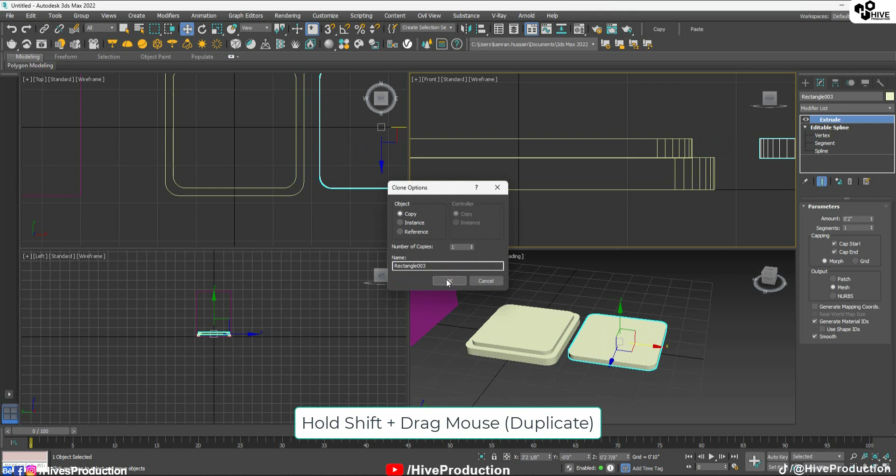Take the duplicate by holding shift key, and after that take their spline, scale down their size more, make them centered, and make them outline to create some beautiful extrusion and apply the extrude. So you can see one object is filled and the second one is filled with their amazing outline.

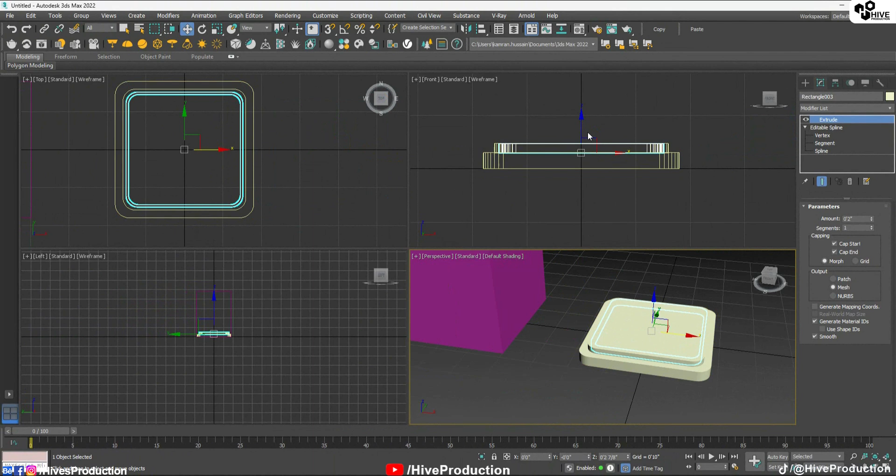I'm going to put them on the top like this. So this is my 4 feet tall box.

I'm going to give the simple box and I will draw a box approximately 10-inch or 9-inch height. 9-inch has to be 10-inch, perfect.

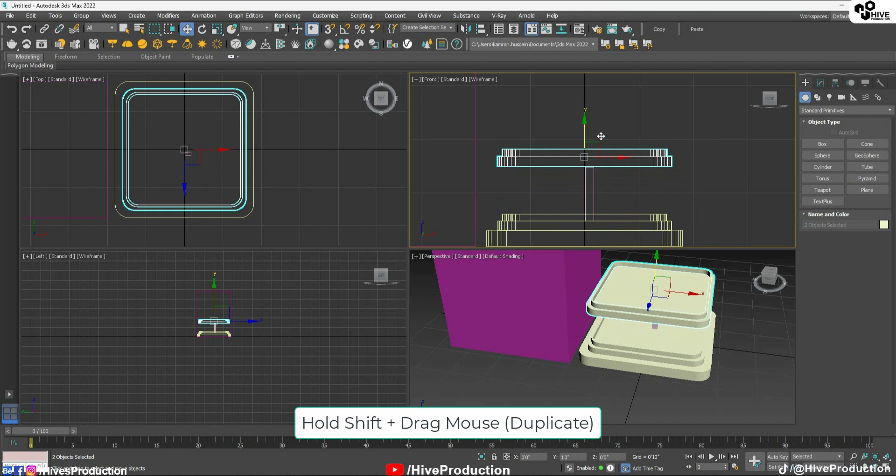So I'm going to put them here, select their shelf, and take the duplicate by holding shift key, and I'm going to take 2 more duplicates. So it's total 3 duplicates.

Now I'll go to the modify panel and I'm going to draw a rectangle by 4 feet height. I'll delete this one. I'm going to check their measurements, 3 by 3 feet, 4 by 3 feet, sorry.

I'll go to the editable spline conversion, right click on it, convert them into spline, take their segments, delete this extra one, and then select the vertices from the top and make it fillet to create some smooth edges.

After that, put them here and select the spline, go to their options and find outlines, give them outline depth something like this, select the vertices and set them on the corner like this. From both sides, select them on the corner like this.

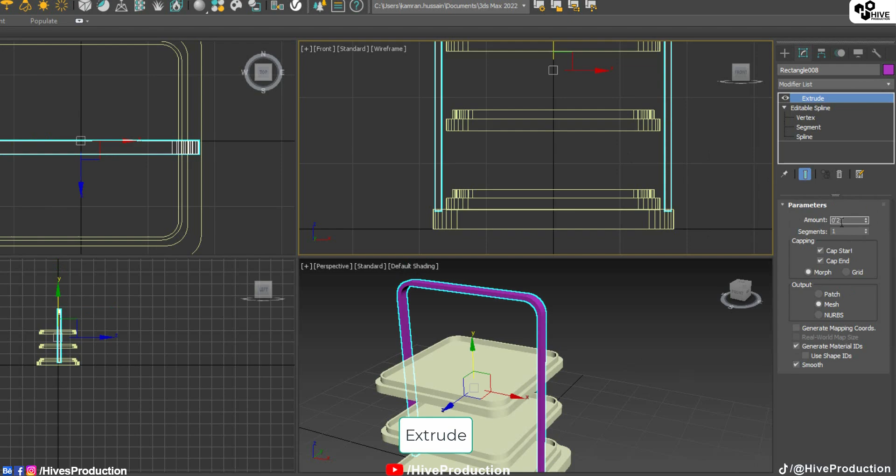Now go to the extrude modifier, give them a depth approximately 2 inch, I think that's 1.6 inch. I think that's much better, and scale down their depth as well.

So it's the basic structure as you can see on my 3ds Max software. We have to go to the editable poly, select them and convert them into poly, and after converting into poly I'm going to give them edges.

Go to the edge tool. First I'm going to give the color change, and give them a line like this. Select the line and select the vertex, make them fillet to create some smooth edges.

Just for my observation, I have to set the shape of this object. Let me show you what I'm going to do. I'm going to select this one, go to the edge, find edge connect.

And give them edges by connection like this, and I'm going to set these edges according to the direction of this. Now I'm going to delete them, delete this one, I don't want them.

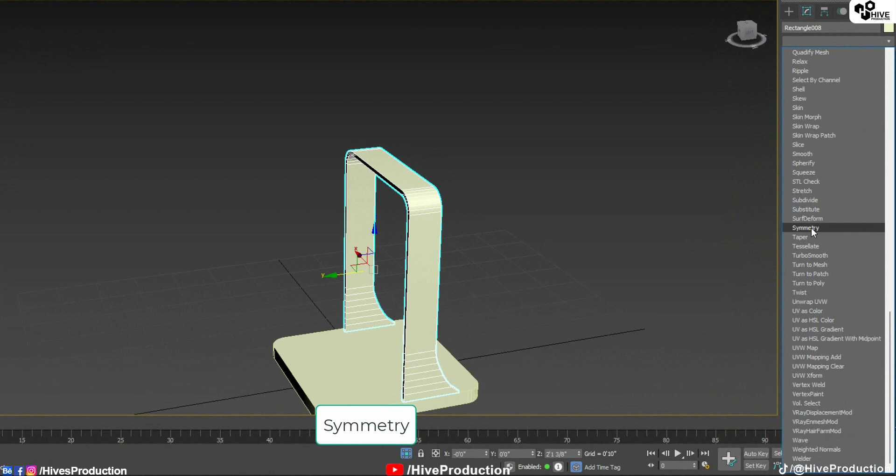So now it's filled, and I'm going to apply symmetry modifier. Symmetry will duplicate from the front and back the same positions. So this is the basic structure of my product shelf.

So what am I going to do? I think we should take another rectangle, and I'll draw the rectangle from this position here.

Convert them into editable spline. Select their vertices, put them here. Select this top vertices and make them fillet to create a smooth edge, and then put an extrude modifier to give some depth, not too much. I think this depth is okay.

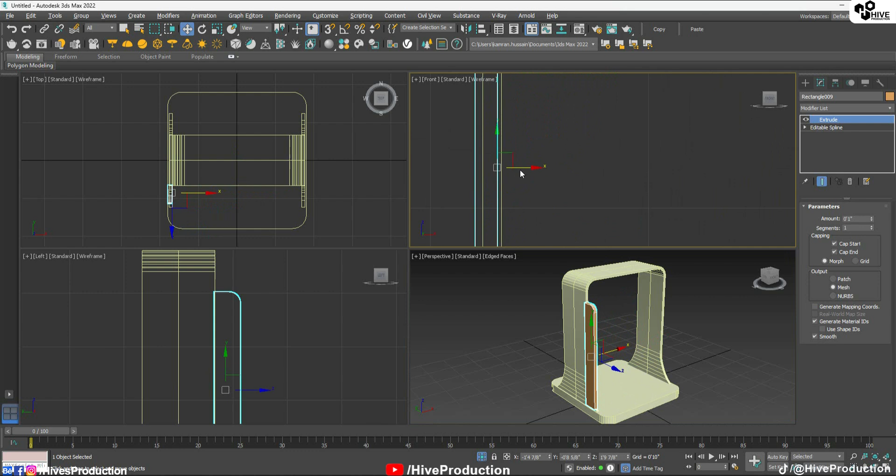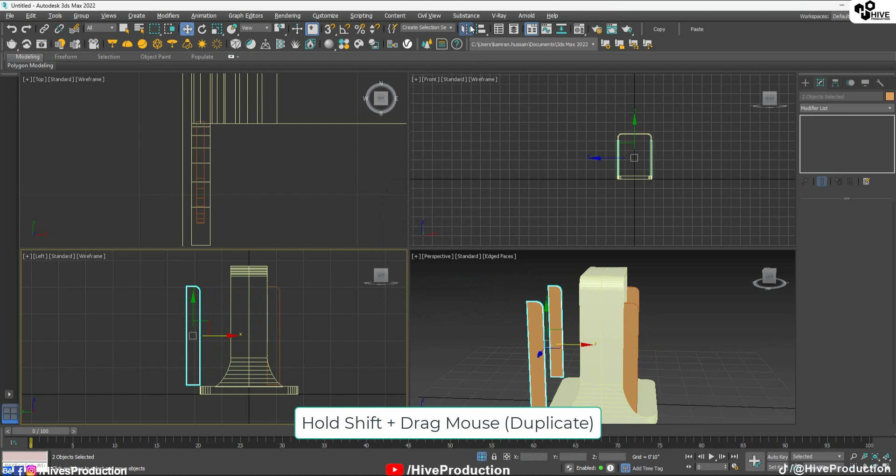So I'm gonna place it by scaling here, and then hold shift key and duplicate from the other side. Once again select both of them, hold shift key and duplicate from the back side as well, and place it here.

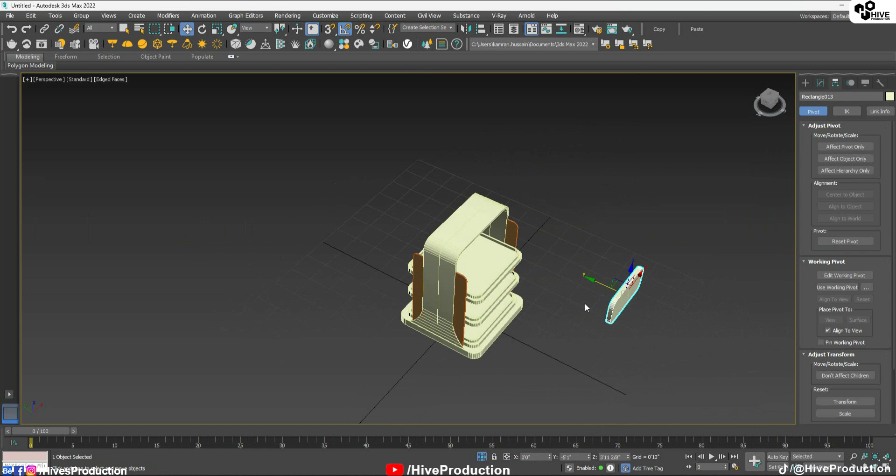After placing, we have this shape. What am I gonna do? I'm gonna take another duplicate by holding shift key, rotate them, take vertices, reduce their size, and extrude. Rotate them 90 degrees, put them on top for the header, like this. It's going to be the header, so I'm going to place it here like this.

Perfect. My next step is to convert them into editable poly. Take the polygons, go to inset, and then extrude like this. Perfect.

I'm gonna take a duplicate by holding shift key and mirror them, or maybe rotate them, and place it on the back side as well.

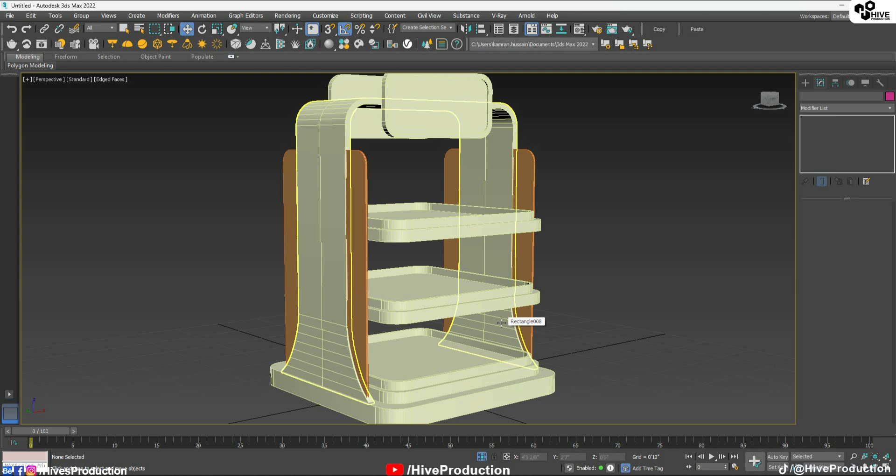So the time is to put the product in it, but here is my logo and product name. It is in Adobe Illustrator. I'm going to group them both, and this is my logo, so I'm going to save it as Irone Logos with the version 8 of Illustrator.

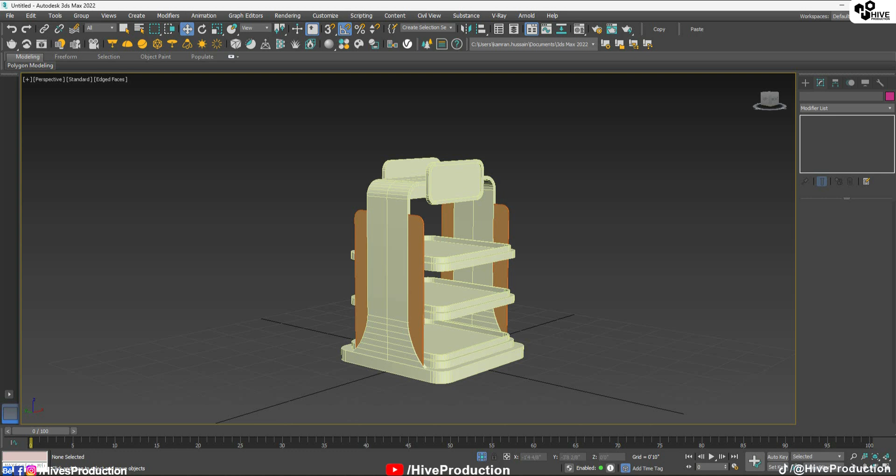So I'm going to import this one into my viewport, which is on my desktop, logos file. OK and OK, so you can find these are my illustrated logos here.

So I'm gonna increase their interpolation to create some more details, and also apply the extrude modifier to create some 3D depth in it. Here it is. So convert them into editable poly.

Go to the polygon, select one of them and detach it. I'm going to separate both logos because one is the product logo and the other is the brand logo, so I'm gonna separate them. Irone is my brand name, Roir is my product name.

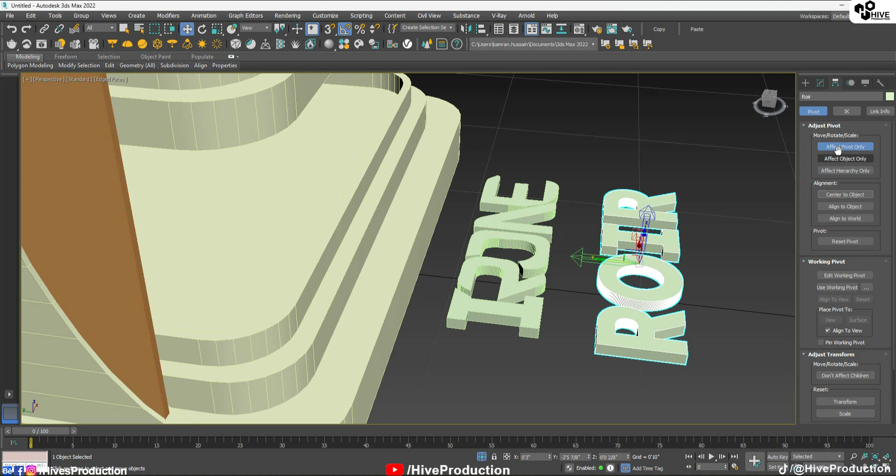So I'm gonna put the Irone name on the top, rotate it and place it not here, but on the top like this.

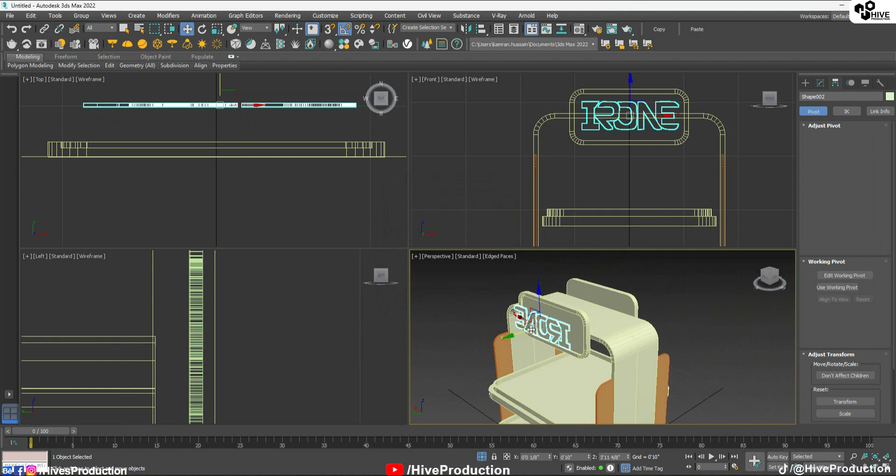And I'm going to duplicate by holding shift key and put them here. Hold shift key and make a duplicate once again, and place it on this shelf talker in the center, like this, here in the center.

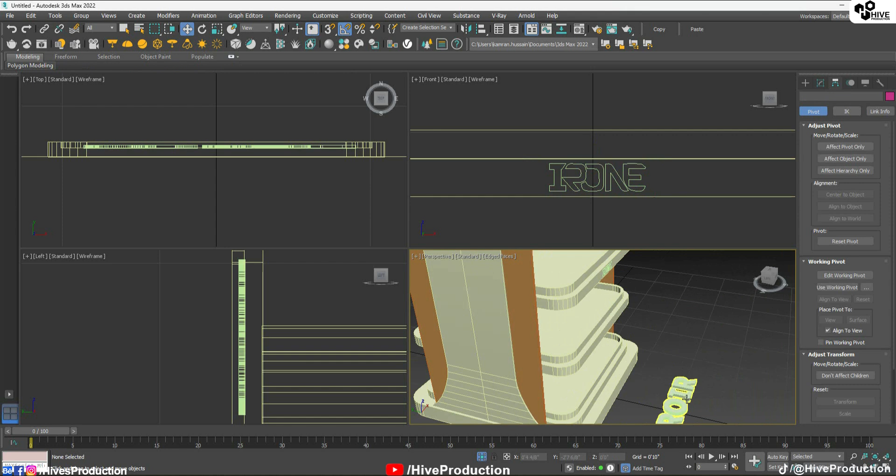So I'm going to take the Roir, rotate it and scale down its size, put it here on the right side. Hold shift key and take a duplicate on the left side as well. Select both of them and place them on the shelf talker like this.

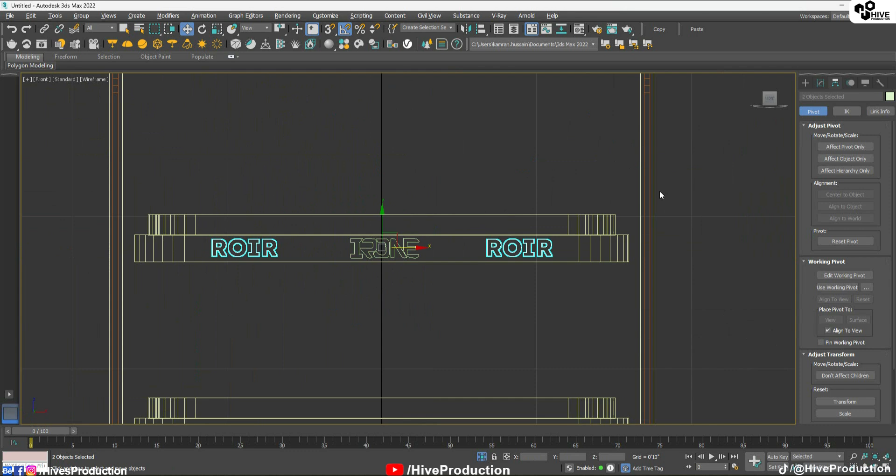So I'm going to select these three or four of them, hold shift key and duplicate here, another duplicate here. So we have the names, we have the Irone, duplicate once again, rotate them and place on the right and left side of your product shelf like this.

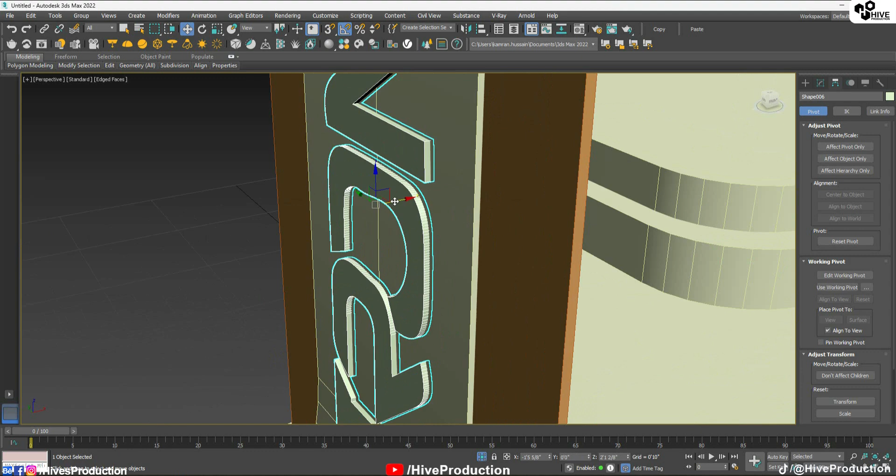So I'm going to place it here. Hold shift key and duplicate them, and rotate them. Now place it here.

Okay, so we just need the products. These are my products which I've already modeled before, and you guys can get the link in the description of this product modeling tutorial on my YouTube channel, this one, product rendering in 3D Studio Max.

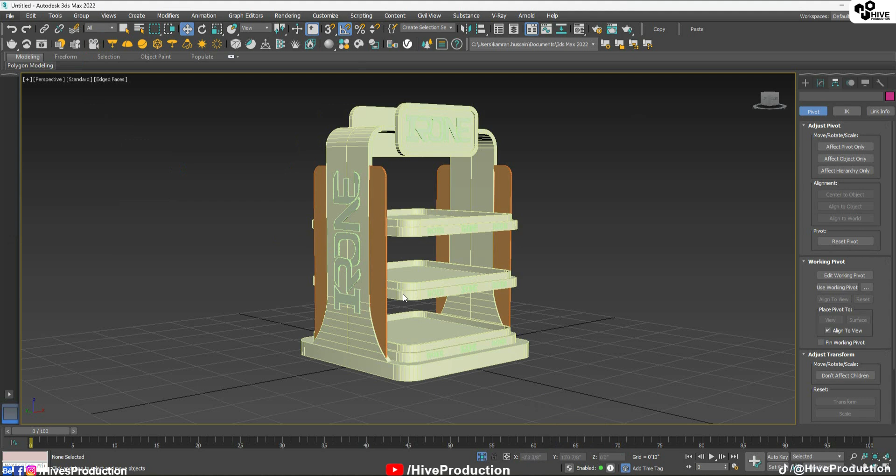So I'm gonna call these products from import and merge. Here is my bottles, I'm gonna call all these 6 bottles here.

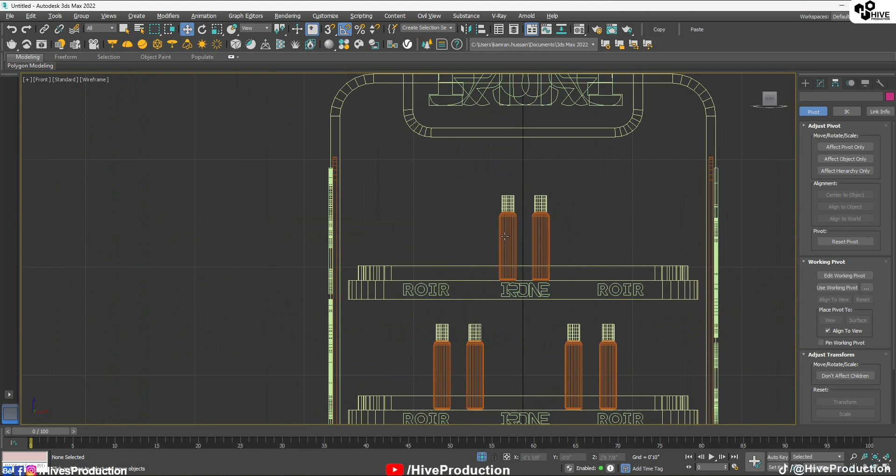So what we need to do is select them and place them here, these 2 bottles here like this, these 2 bottles there, here and here, on the same alignment from the top, center and bottom. Put them here. Perfect, so I'm gonna select them and put them here. That's perfect.

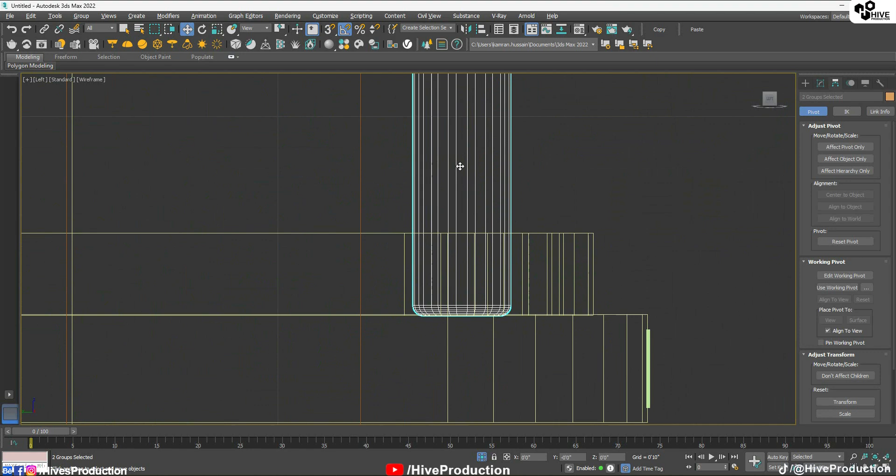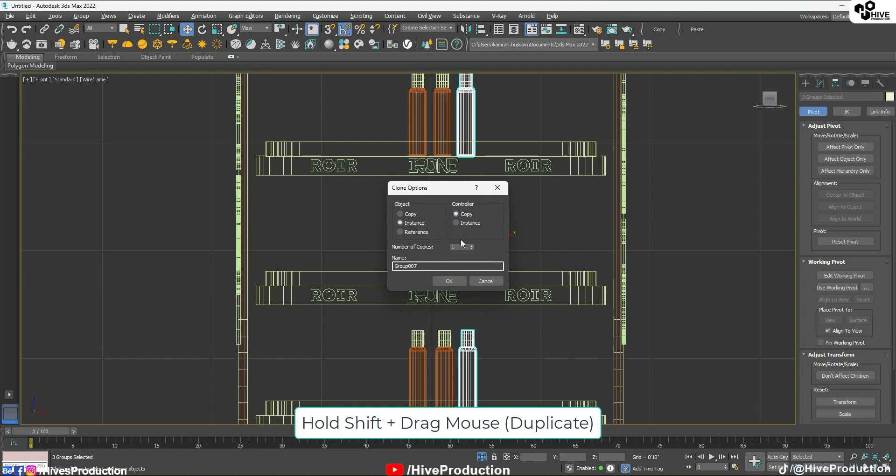Place these bottles on the shelf talker very clearly and carefully. So I'm just going to set these bottles close together. Perfect, hold shift key and duplicate like this. Select them, hold shift key and duplicate like this, so we have these duplicates of these bottles.

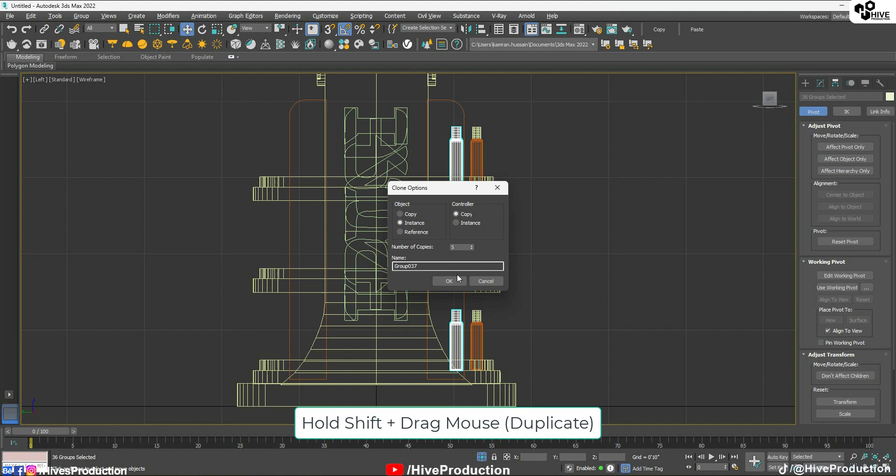From the left viewport, I'm going to duplicate these bottles on the back side. Hold shift key and drag your mouse. That's perfect, we have increased the quantity of these bottles.

I'm going to select all of them, and duplicate all of them by holding shift key and drag my mouse, and I'm going to rotate them. Perfect, and now place them from the back side once again.

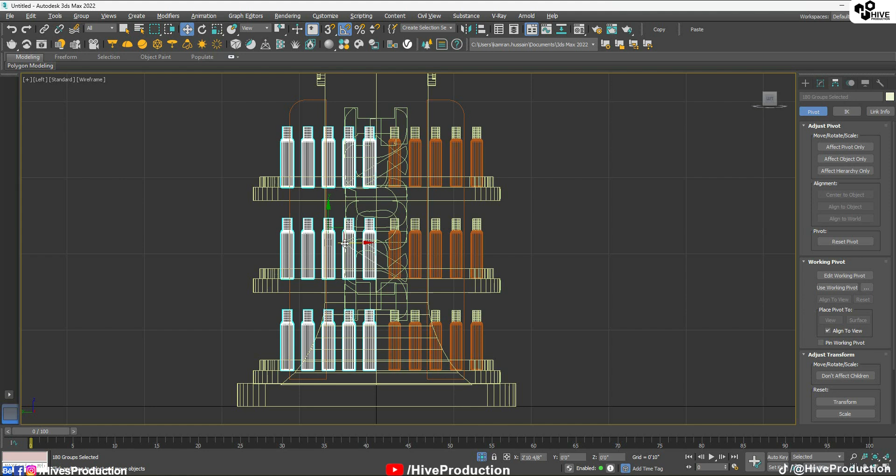Okay, select and duplicate just to fill these racks. I'm going to select all of them and make them a group called bottles. So we have fulfilled these products in it, and now it's time for the texturing.

I'm going to go to the material editor, create a Vray material, and take this dark gray color with reflections at 0.85 glossiness. I'm going to select all of these and assign this dark gray color, close to black, on the product shelf. Here it is, that's perfect.

Now I'm going to take another Vray material with a bluish color and 1% glossiness, with high refraction because it's going to be my glass. I'm going to select these products and make them transparent glass, which looks beautiful.